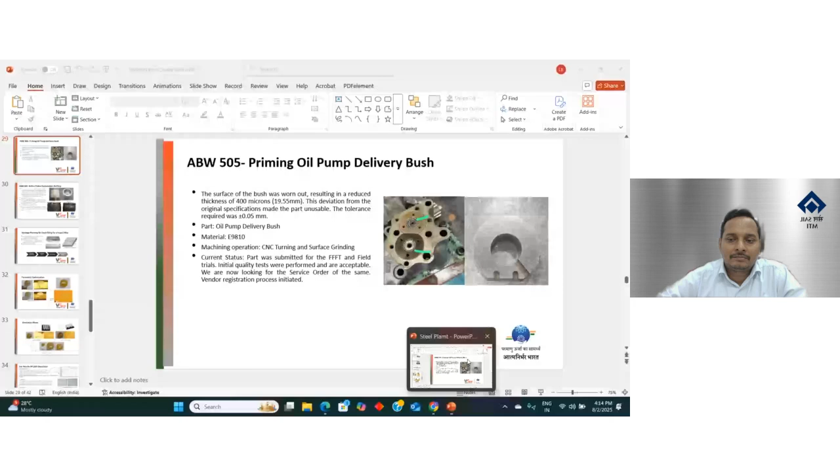Coming to VFuse Metal, it's a part of Adroitec Group. It was founded in 2023, and it has been incubated at RRCAT Indore, which is our Department of Atomic Energy associated research center. We majorly focus on metal 3D printing, MRO, and cladding-based services.

It's a DIPP recognized startup. We are driven to provide best-in-class additive manufacturing solutions. Our vision is innovating manufacturing one layer at a time, and our mission is to promote indigenously developed technologies in metal AM and additive manufacturing to the global market. Our core philosophy is a 3R strategy, which I will explain later in my presentation.

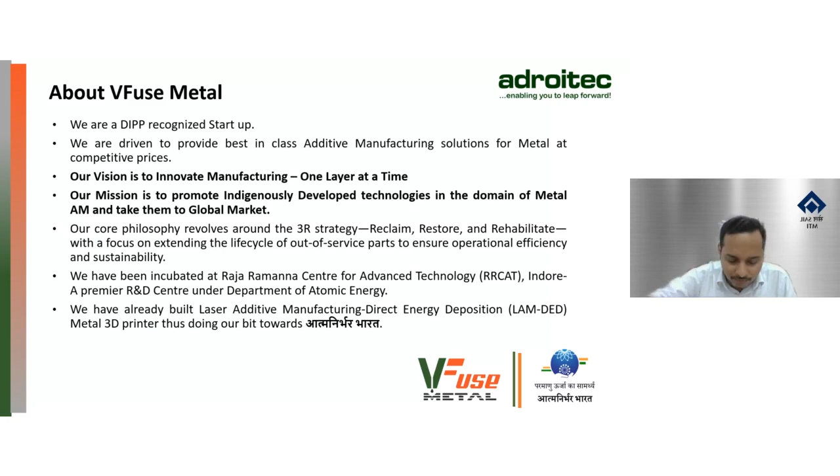Coming to the technology - there is a coaxial nozzle, as you can see here, in which metal powder comes from the side and a laser beam comes from the center. Wherever they meet, it forms a melt pool. This nozzle can be mounted on a 3-axis system, a 5-axis system, or an 8-axis robotic system for higher depositions.

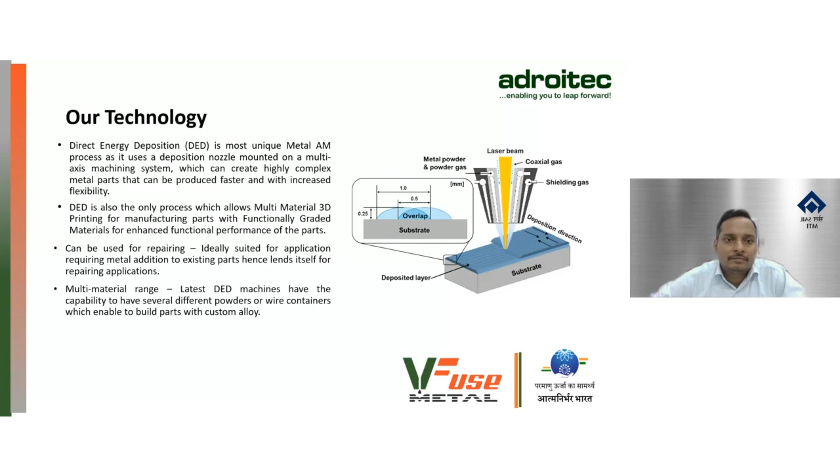This is a short launch video of our current system installed at RRCAT, our demo system. This was launched by Dr. Chintan Vaishnav and Dr. V. Narayanan, who is the current chairman of ISRO.

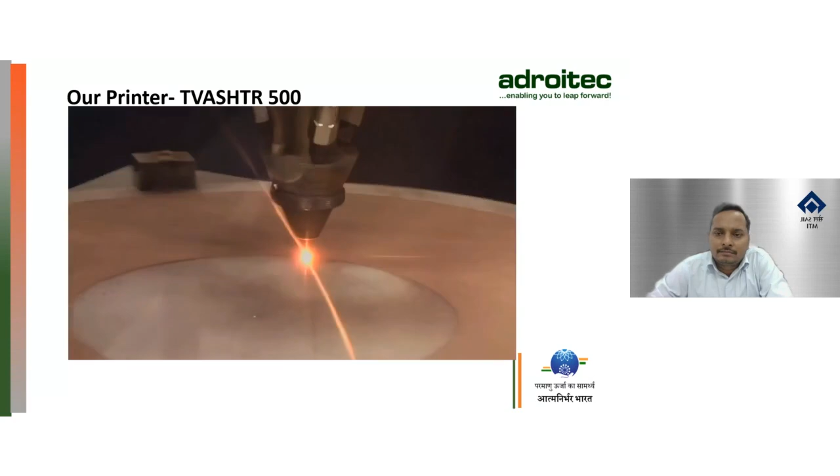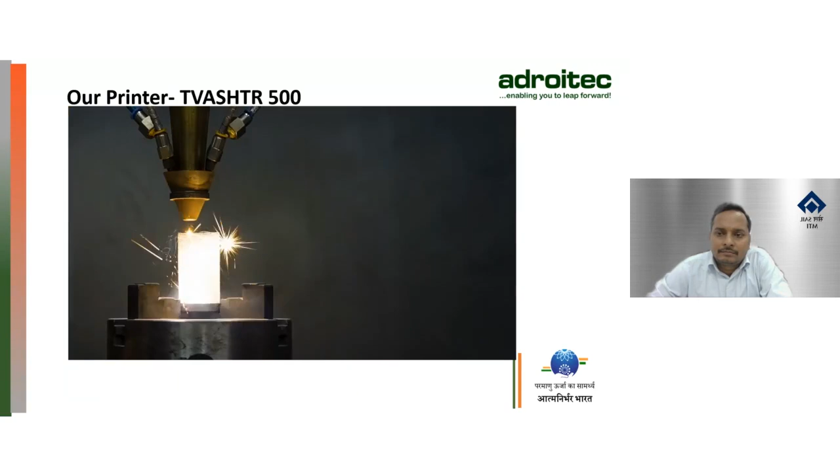Once again, we would like to highlight the fact that this is an indigenously developed metal 3D printer, which is working successfully, and we have completed it. Lalit is going to share more. So the deposition head has been built in collaboration with RRCAT Indore. We are further working and improving it. So this is the core we want to highlight here.

Coming to our capabilities, we are a system manufacturer and can provide system enhancements as well. We are an OEM, so we can provide system manufacturing services. A custom system for your specific needs can be designed and manufactured for you. Whatever enhancement you want in our current system, we can provide, as I will explain in the next few slides.

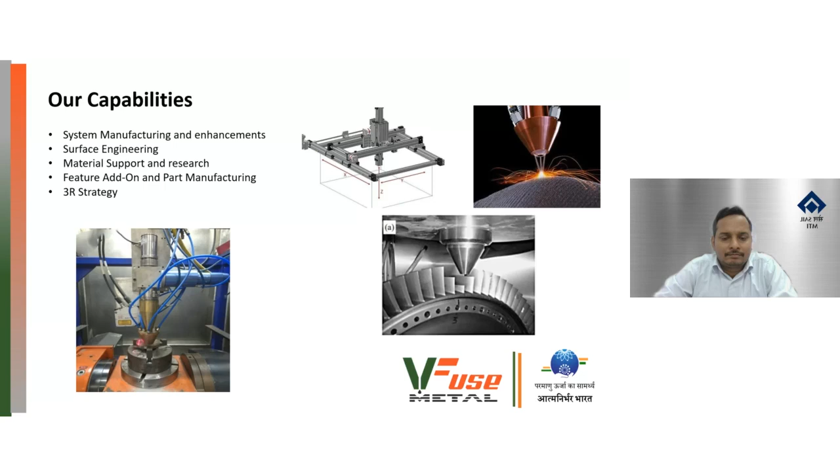Our second capability is surface engineering, material support and research, feature add-on and part manufacturing, and the 3R strategy.

Our capabilities include customizable system manufacturing. The current system we have installed at RRCAT is a 5-axis system with a high laser power of 2 kilowatt and a build volume of 500 by 500 by 300 mm. For material research, we have designed a new system called TVASHTR 250, a material research engine with low operation cost, basically meant for research centers and IITs.

On TVASHTR Robo Plus, we are integrating wire arc additive manufacturing with laser additive manufacturing. Bulk deposition and large deposition at faster speed can be done through wire arc, while small features and fine geometry can be done with the laser DED process. So we are integrating two additive manufacturing solutions on one single platform.

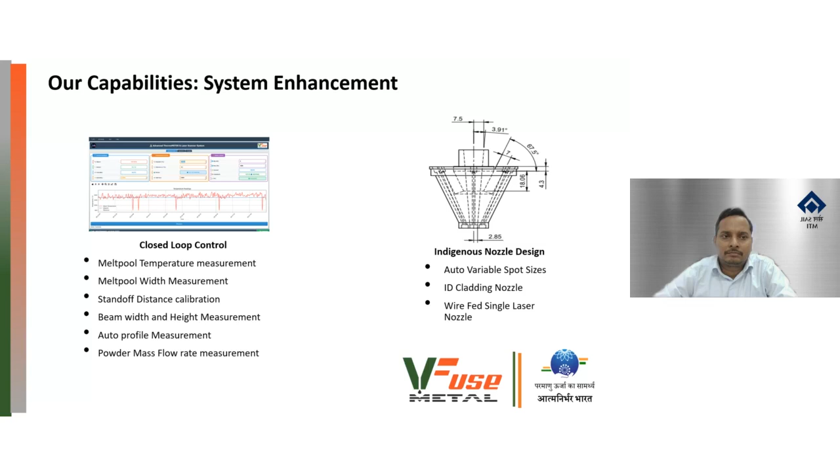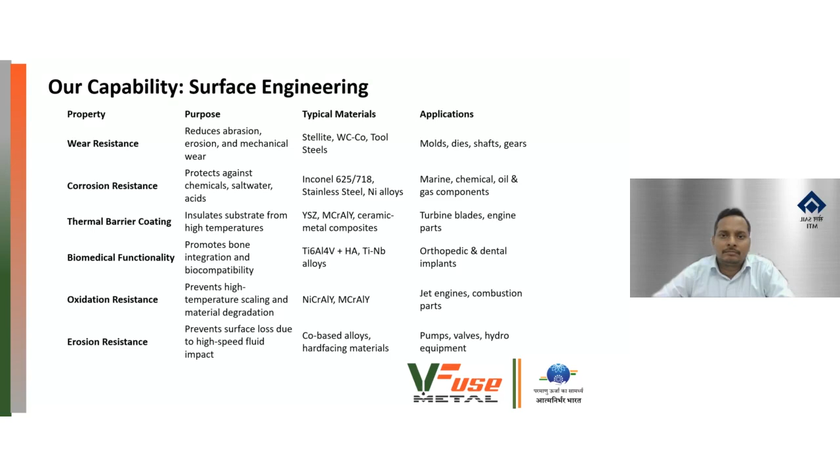Coming to our capabilities in surface engineering, we can provide wear resistance, corrosion resistance, thermal barrier coating, biomedical functionality, oxidation resistance, and erosion resistance to steel plant parts that generally get eroded or corroded during operations. We have already tried most of the materials, and I will showcase a few case studies in the next few slides.

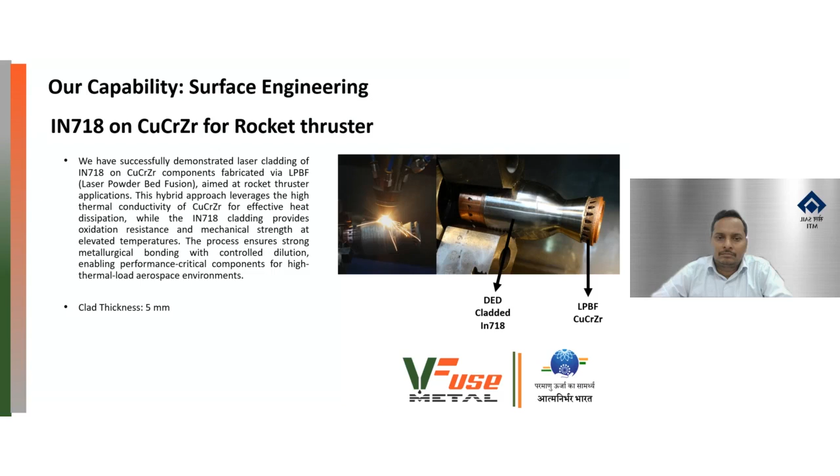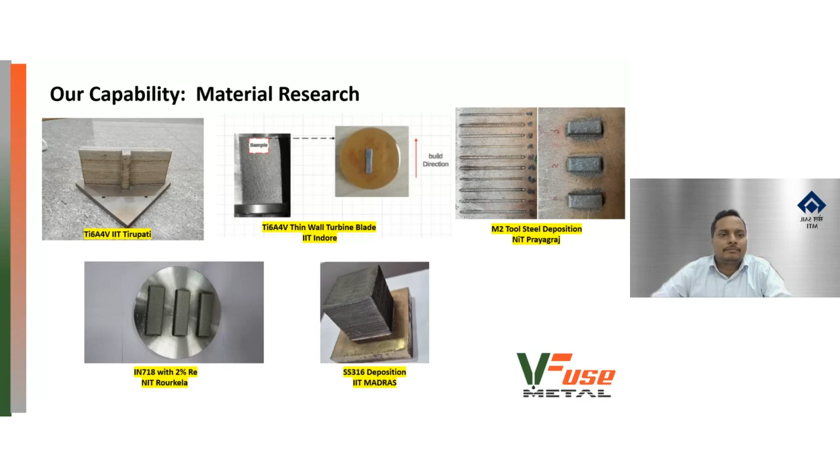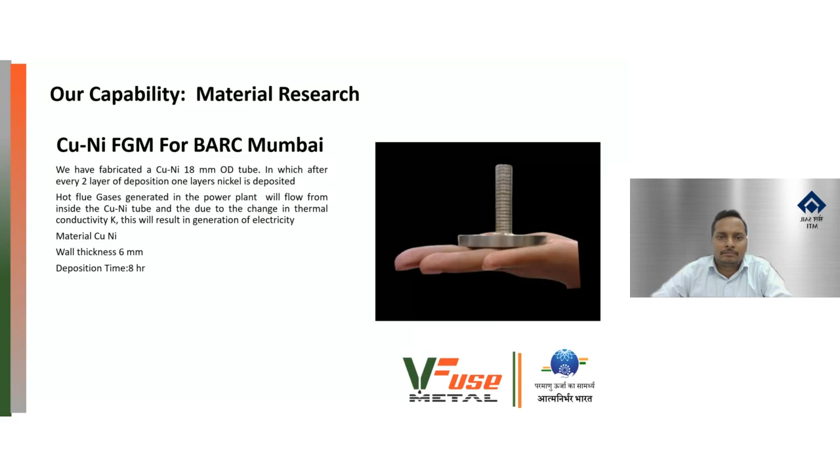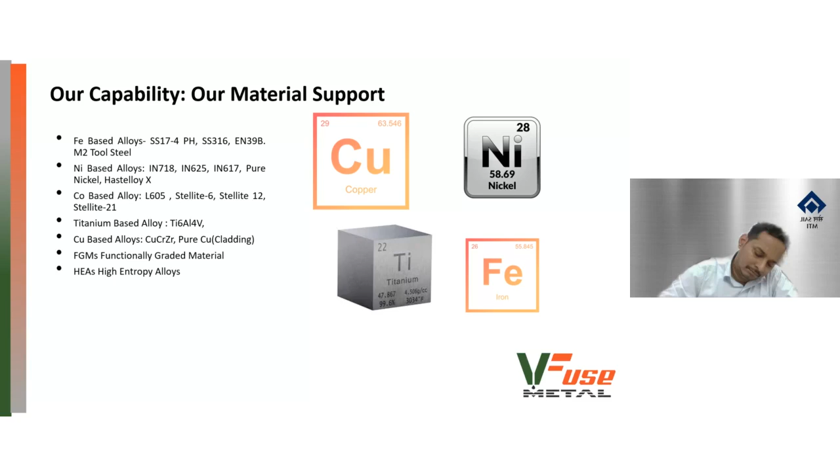These are the current material support that we provide. We have extensively researched on Fe-based alloys, nickel-based alloys, cobalt-based alloys, titanium-based alloys, copper-based alloys. In cobalt-based, we have basically done with L605, Stellite 6, Stellite 12, some super alloys to have very good wear resistance.

These are some of the material research we have done with RRCAT.

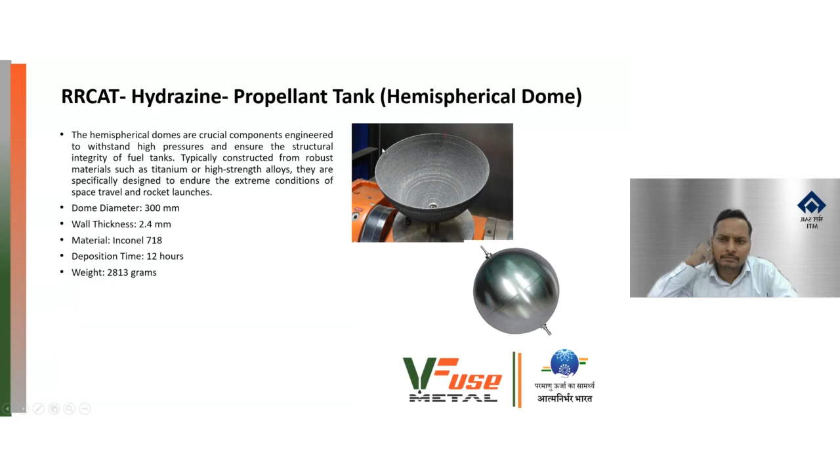Coming to our third capability, which is feature add-on and part manufacturing. So we have manufactured a hemispherical dome for one of the space organizations. This is a 300 dome kind of structure. This is basically a rocket propellant tank in which the hydrazine will be stored.

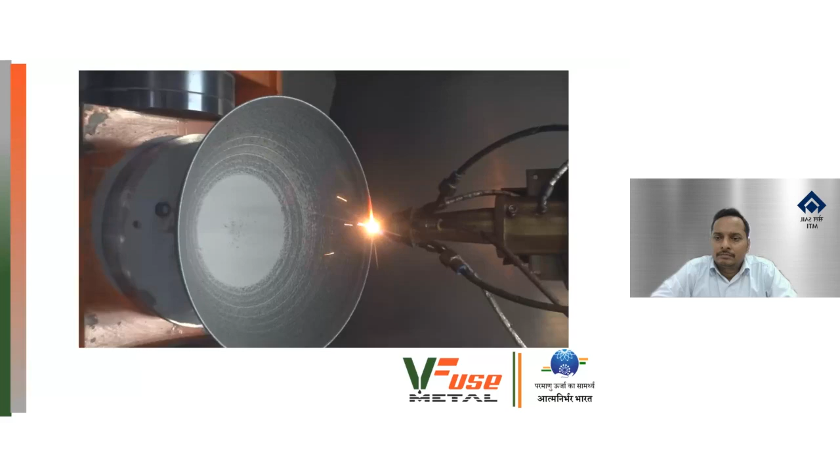A small video of deposition just to give you an idea of how a 5-axis system can be used for having supportless parts in additive manufacturing.

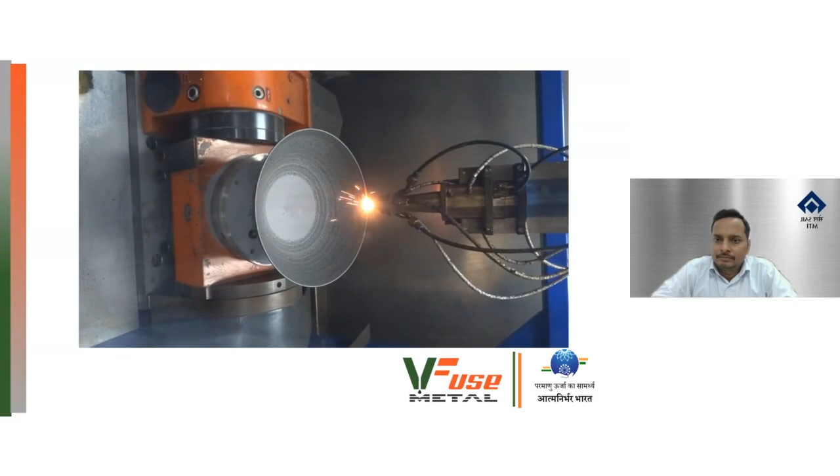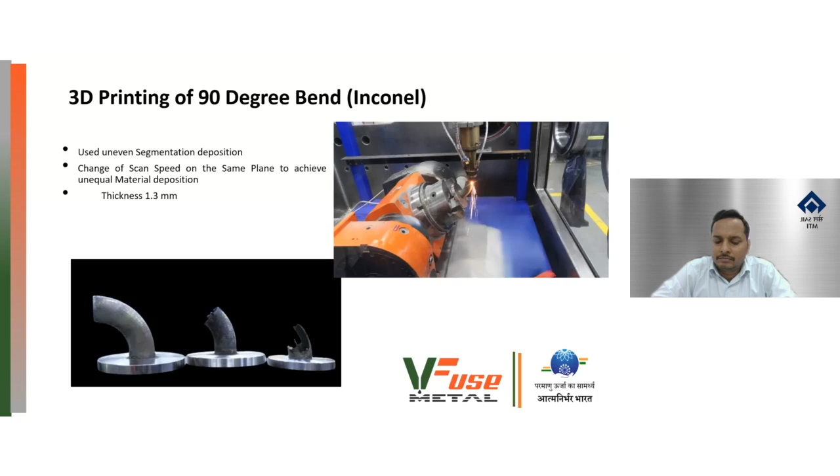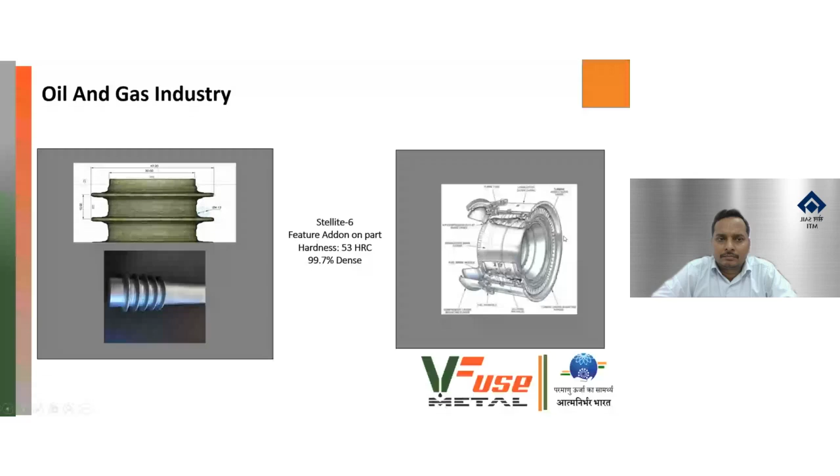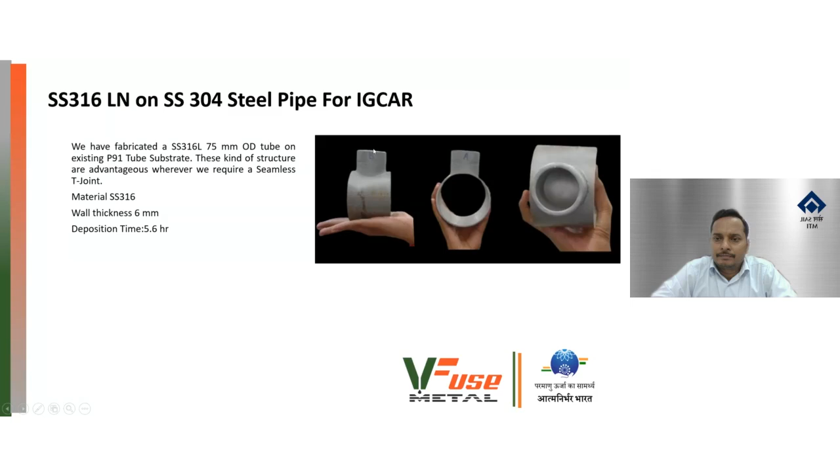So our major capability is MRO, and I think this will help steel sales as well, majorly because the majority of the parts in steel plants are imported out, or the steel plant itself is Russian made or made outside. So generally the parts get worn out, and we have to import those parts. So the whole supply chain management needs to happen here.

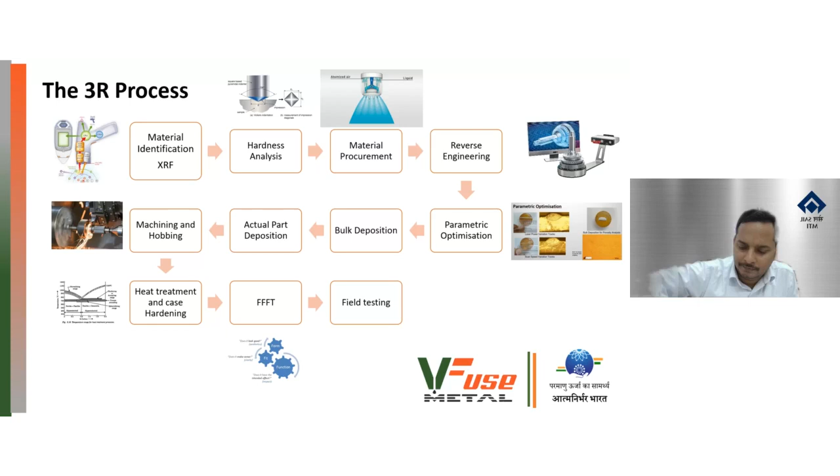So carry on, Lalit. Yes. If it's a new material, then we will do the parametric optimization of it, and then on the actual part we will deposit it out. We do the machining, the heat treatment, triple FT, form fit, and functional trials will be done, and it will be given to field testing for actual in-the-field performance.

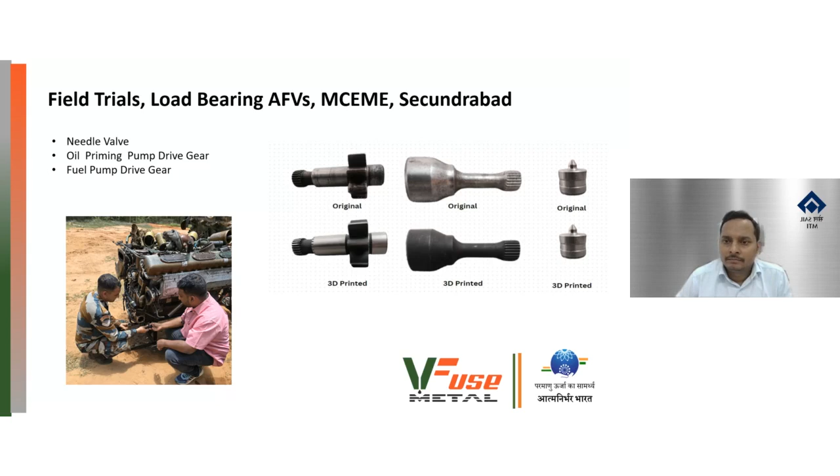These are some of the parts that we did for a load bearing tank. These are the gears in EN39B, and we have successfully done field trials for these gears. Worldwide, majorly, most of the industries, no one in the world has printed EN39B before.

This is a new strategy that we are proposing. Suppose there is a gear which has been worn out, or one of the teeth got worn out. We will remove that particular tooth, deposit that particular tooth, and then do the wire EDM of it. We will machine it out, case harden it, and give it back to the field.

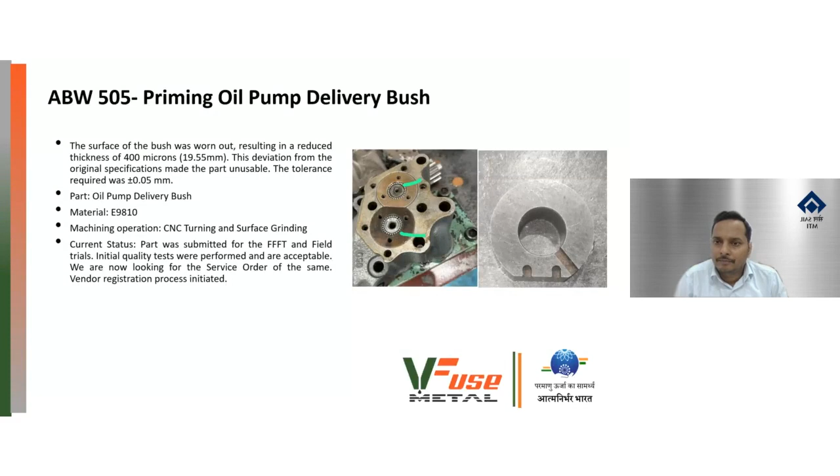This is again a project we do for defense. Basically, this is an oil pump assembly of a tank. So the top portion of the assembly, this is a bush, which generally gets worn out only by 400 microns in thickness. We have redeposited it, machined it out, case hardened it, and given it back to service.

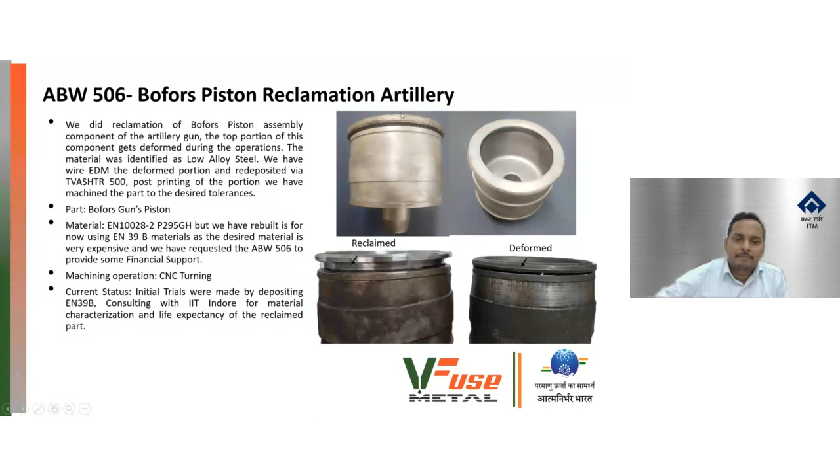This is a piston for a Bofors gun. This is a project we are doing in which the top portion is deformed. You can see it in this particular picture. We have redeposited and remachined it, and given it back to service.

This is a project we are doing. We did it for one of the defense laboratories, in which we have defined a strategy to fill 100 by 0.2 by 2 depth cracks, which is generally available in most industries as well, in dies and molds. This is an aero engine part, and we have successfully deposited material.

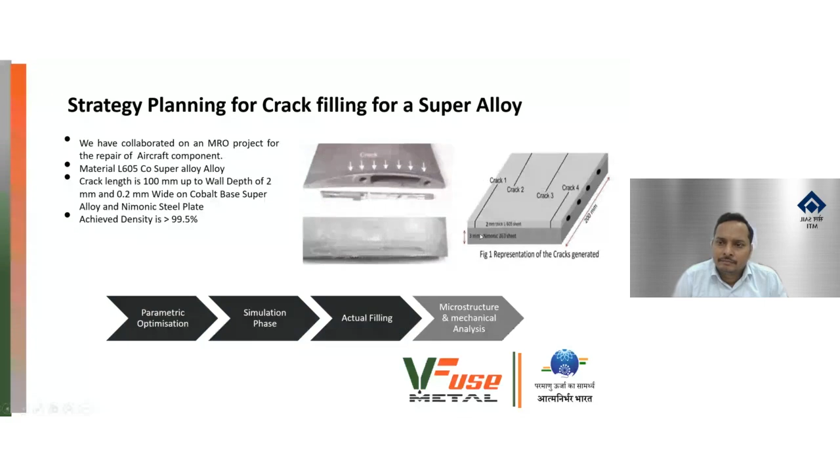We have derived a strategy. They provided us a similar simulation plate for it, and we derived a strategy to repair these kinds of cracks. So in this, we have grooved out the crack to a 5 thickness by 2 depth, using a trapezoidal strategy and a semicircular strategy, and we have tried it.

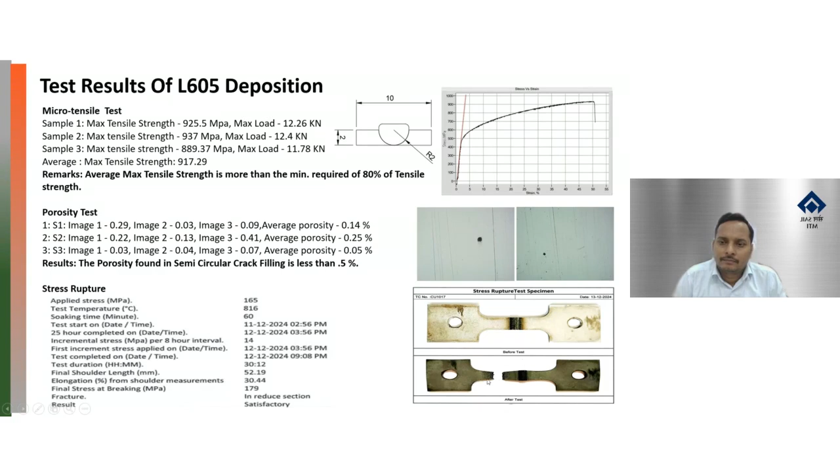If you do the laser welding, what will be the results? We found that with the semicircular strategy we got the best results, with our maximum tensile strength of 917. The actual part has a tensile strength of 896 MPa, and we have basically achieved porosity levels less than 0.5%. The good fact is, at 816 degrees Celsius, under stress rupture test, at 179 MPa pressure stress, it broke from the substrate, not from the crack that we had deposited.

These are some other cases that can be useful in your scenario as well. This is a fixture in which one portion got worn out, so we tried to reclaim that particular portion. I cannot name the client for this because it's under NDA.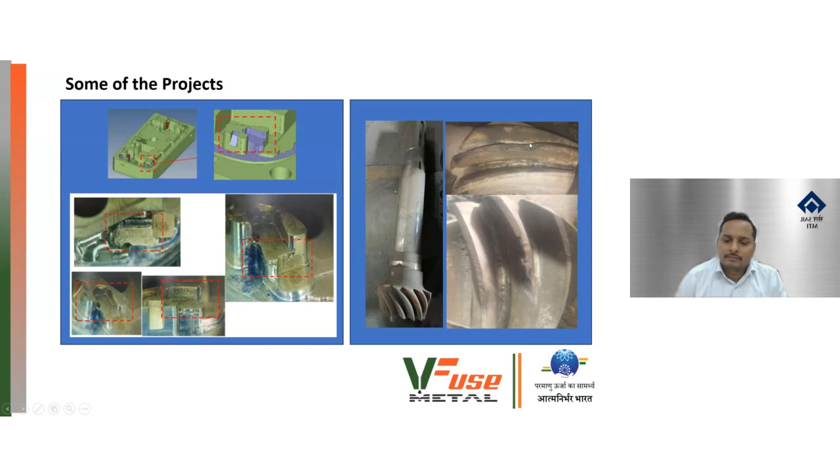This is a tooth which is deformed on a 1 meter long gear shaft pinion, and we are reclaiming this particular tooth as well.

Some of the steel plant case studies: this is a case study we are doing for one of the steel plants, in which we are enhancing the wear and corrosion resistance of the steel rolling mill rollers. We are depositing Stellite 6 over it and tungsten carbide over it.

Currently, we are evaluating the material side of it. We have collaborated with IIT Indore for this particular project, and also with PEC Punjab, Chandigarh, so that we came up with good results for them on how to basically achieve wear and corrosion resistance, and how to repair rolling mill rollers, cold mill rollers for steel plants.

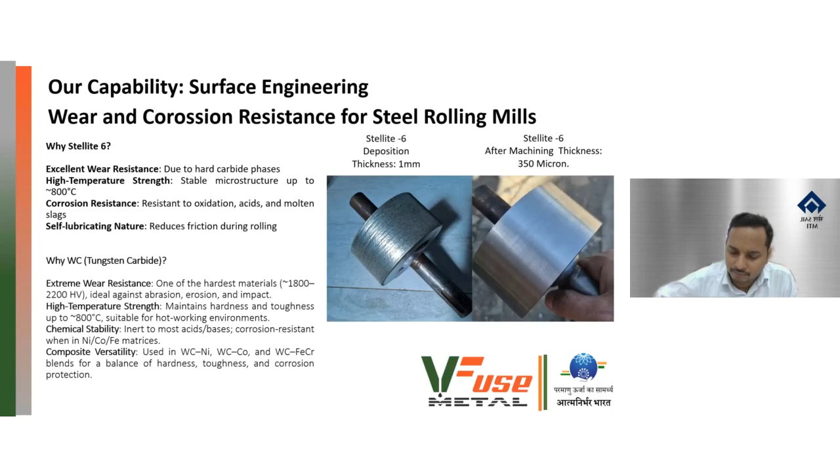These are some worldwide case studies for steel plants, including stone crushers, crusher rolls coatings, ball mill coatings, and ID claddings. We have a specific nozzle for ID cladding where you can clad inside the material and repair inside the pipe as well.

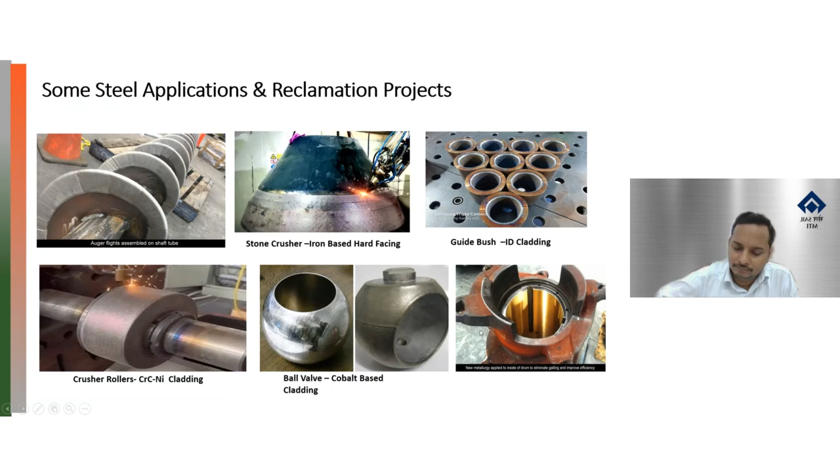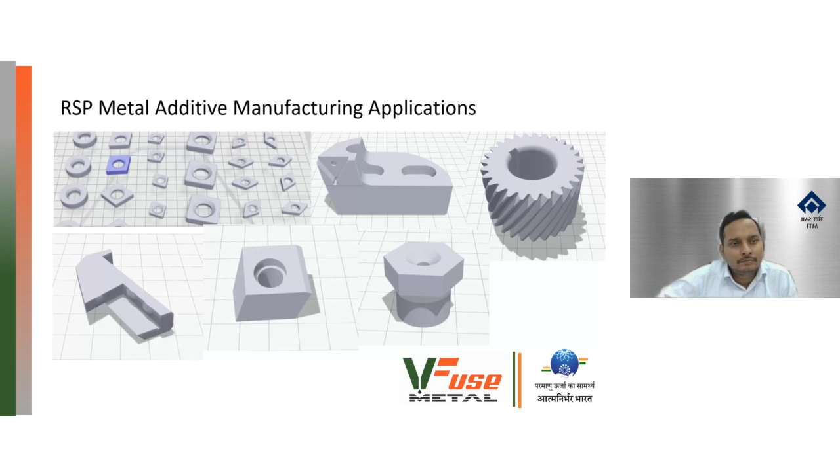These are some use cases of RSP, Rourkela Steel Plant. They have also installed one metal additive solution. We have a team there and we are completely supporting them for their design and manufacturing processes. These are some of the parts that they have printed on their machine.

So thank you so much, Lalit. Sorry, Chandra sir, please go ahead. Yes, yes. So thank you so much.

It was really interesting to see so many use cases coming up across industry, specifically using metals. Can you shed some more light on the setup that we have at the Rourkela Steel Plant, how it is operating, and the type of printer that we have there?

Yes sir, am I visible to the dais? Yes, you are visible. Yes sir. Just a minute, Lalit.

Sir, prior to that, we were dealing with those 3D printers back in the days when Rourkela Steel Plant installed the systems there. But now we are very specific on the technology, and this particular technology is much more developed than the RSP one. So yes, we have supplied that, we have successfully run that, and we have successfully done the hand-holding for each and every person, the users of Rourkela Steel Plant.

But for the better proposition of the product as well as the technology, my suggestion will always be for a DED technology for any steel plants where there is no choice of materials as well as no choice of size. As Lalit rightly said, the size can range from very small tiny parts, like what we did for Vedanta steel where the part size is maybe half an inch, up to something as big as a cold roll mill which can be meters in length. So ideally for any steel plant under SAIL or any defense or DRDO organization, currently DED is the most suitable technology for that.

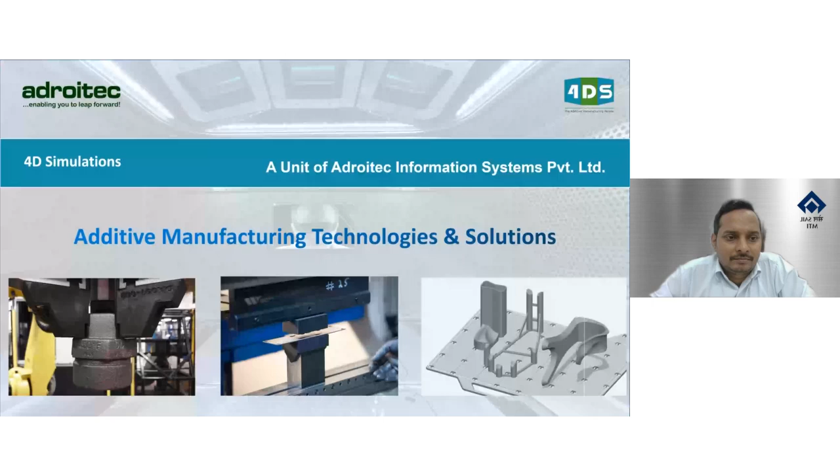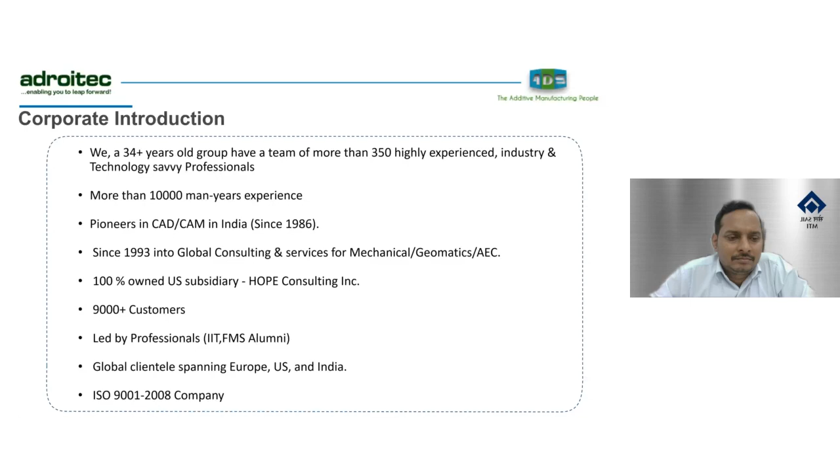As Abhishek sir, Vinod sir, and Manoj sir have already informed you, we are part of Adroitec. Under Adroitec, we have a group called 4D Simulation. Let me talk about Adroitec first - we are a 34-year-old group, and we are the pioneers into CAD CAM since 1986, and currently we are into 3D printing. Specifically for 4D simulation, we currently have every technology available in 3D printing - FDM, SLA, SLS, DMLS, and as Lalit has informed you about DED. So we have every technology that is available in the entire world.

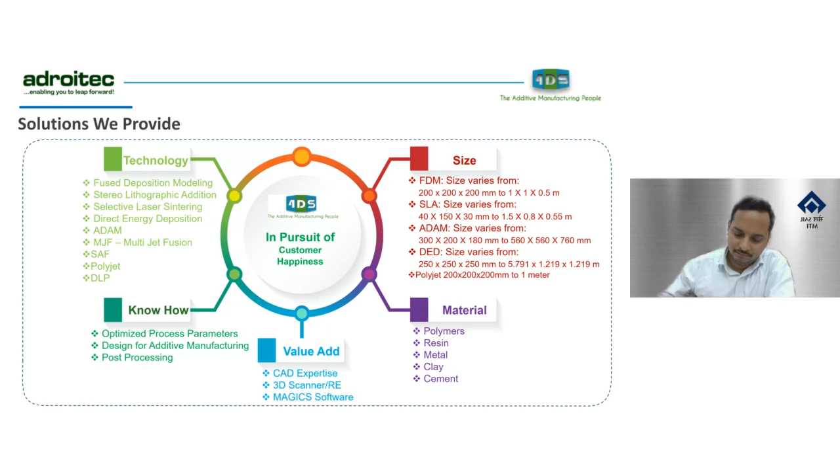Apart from that, the material that we talk about, we have every one of the materials that are available, which include basically polymers, resin, metal, clay, ceramic, cement, everything that you talk about.

So let me talk briefly about the technologies. The first one is FDM, or fused deposition modeling. In this one, there is a filament which is completely plastic or polymer, thermoplastic, which is heated up to a semi-liquid state and extruded on a build platform to get layer by layer addition, and through which you get a completely 3D printed part.

Next one is SLM. SLM currently uses metal particles, metal powder having 15 to 45 microns particle size, and using argon or nitrogen gas flow, we start to sinter those particles to make a single layer, which is added layer by layer to make a completely 3D printed part. So these are the samples for metal parts.

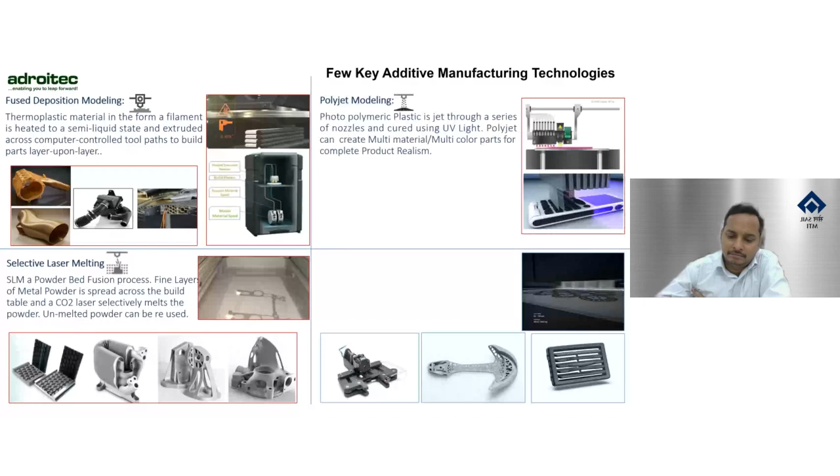Apart from that, we have polyjet technology, which is patented by Stratasys. In this one, we have resin material. As you can see in the video, the resin material extracts out from the head, then we have UV light which solidify that liquid material, and it gets addition layer by layer.

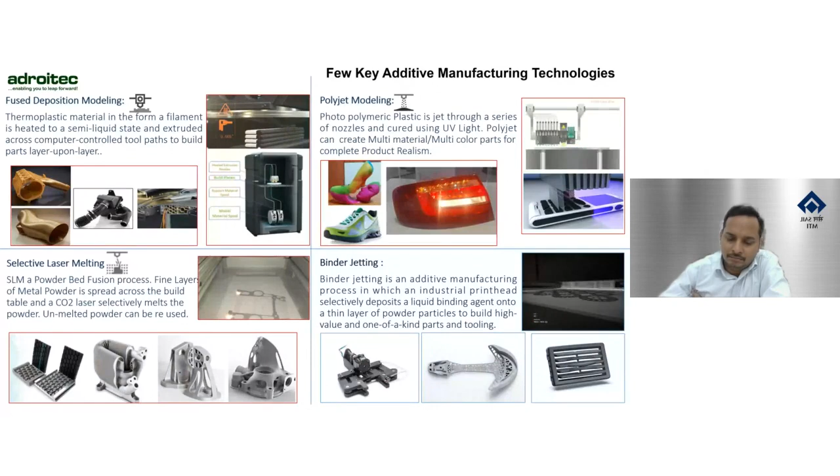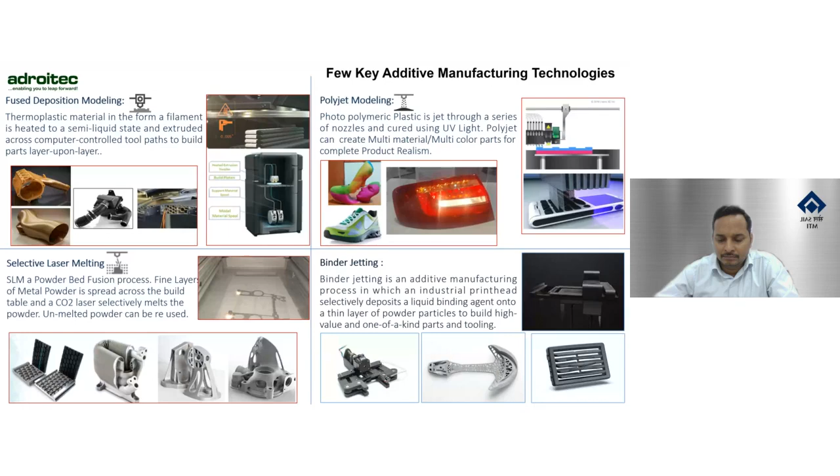The last one is binder jetting, in which we have a binding agent. The raw material is also a polymer, completely nylon. The binding agent binds that polymer, and later on, using high intensity heat, it adds layer by layer. So with Stratasys, we have a good portfolio.

Currently, the one I will talk about today is the F370 CR. CR means composite ready. So what is the plus point for Stratasys? We have multiple materials starting from ABS, ASA for prototyping, up to high temperature materials which include nylon, nylon plus carbon fiber, or Diran. Then we have easy use of this machine.

So these are basically the technical specifications for the machine, as you can see over here.

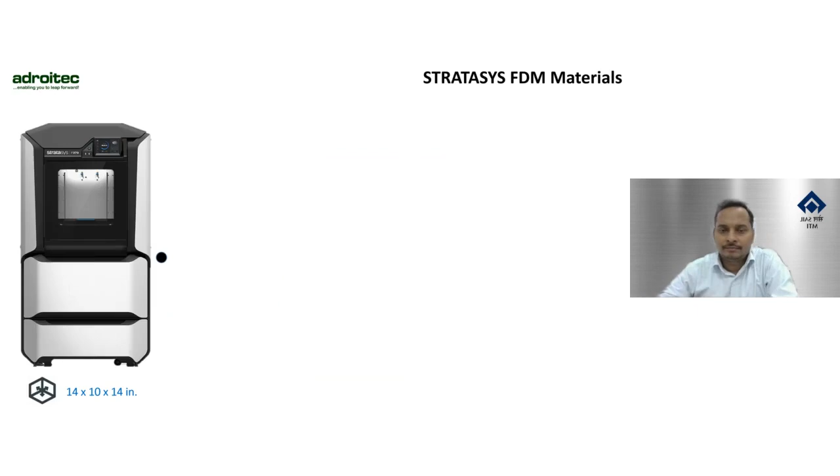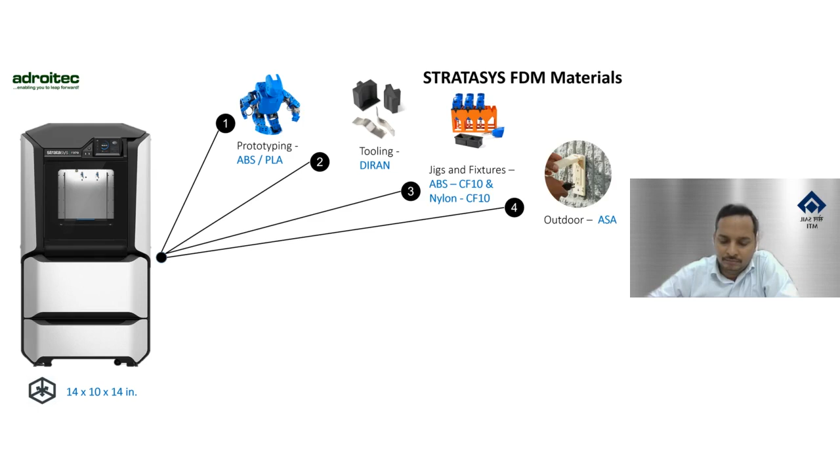As you can see, we have a good material range starting from ABS or PLA. Then for tooling, we have Diran. For jigs and fixtures, we have ABS CF10 and nylon CF10. If you are using the part outdoor, we have ASA material, which is completely ABS but having UV resistant properties. For electrical enclosures, we have ABS ESD material, which resists electrostatic discharge. Then we have flexible material, which is TPU. Apart from that, if you want an assembly part, we have PCABS, which is a composite material.

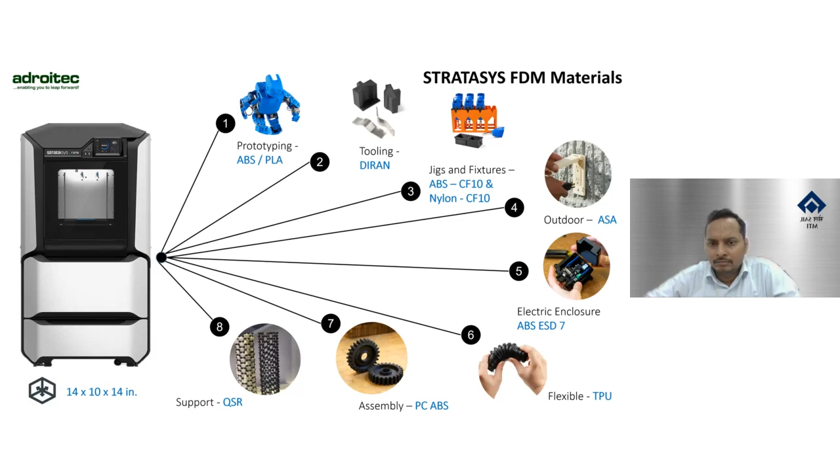The plus point for this machine is, whenever we need supports to get the part printed in 3D printing, the supports used in this machine are water soluble. You just dip the part into the water concentration for 1.5 hours, and after that, all you get is your part without any supports.

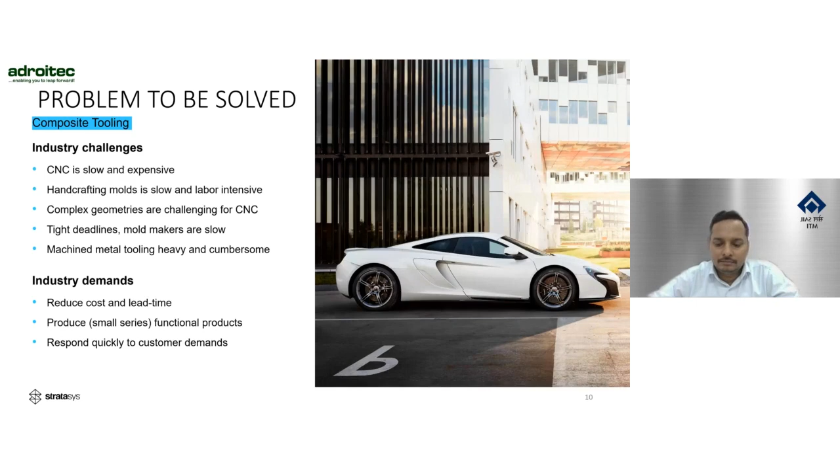So why do leaders use additive for tooling, jigs and fixtures? Because it's cost-effective, time-saving, accelerates production timelines, and allows rapid replacement. Currently, most traditional ways, which include CNC, are very slow. We have a case study in which we replaced a part that was earlier done with CNC, which was taking around 2 to 3 months. After using additive manufacturing, we fulfilled that need in 2 to 3 days. That is the plus point for additive manufacturing into polymers.

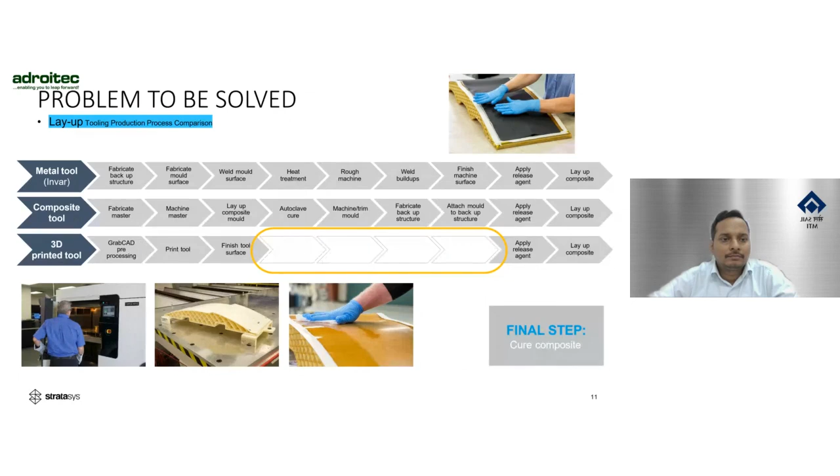If you talk about the traditional way, a metal tool needs a long layup process to be done, while in 3D printing you just have to do pre-processing, print the part, finish it up, and you can use it anywhere you want.

So the materials that I talk about, those are industrial materials.

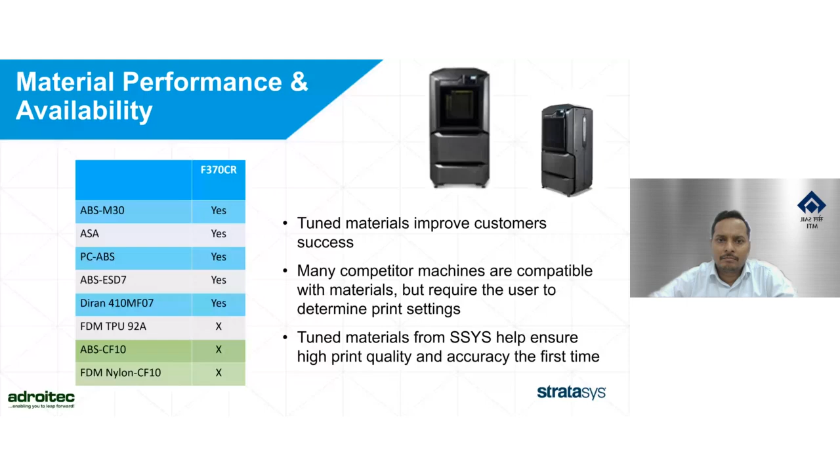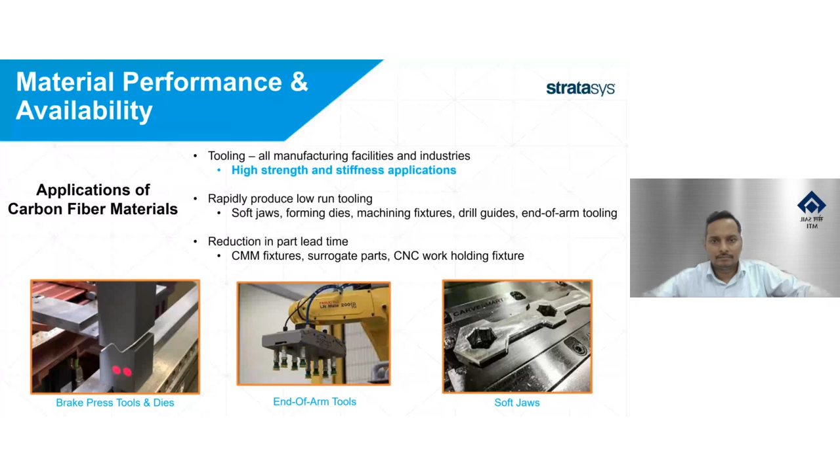So you can use it anywhere. If you are talking about jigs or tooling, you can use that into steel industry. One plus point for F370 CR is you can use carbon fiber material as well. If you can see the brake press, tool and die, end of arm tools or soft jaws.

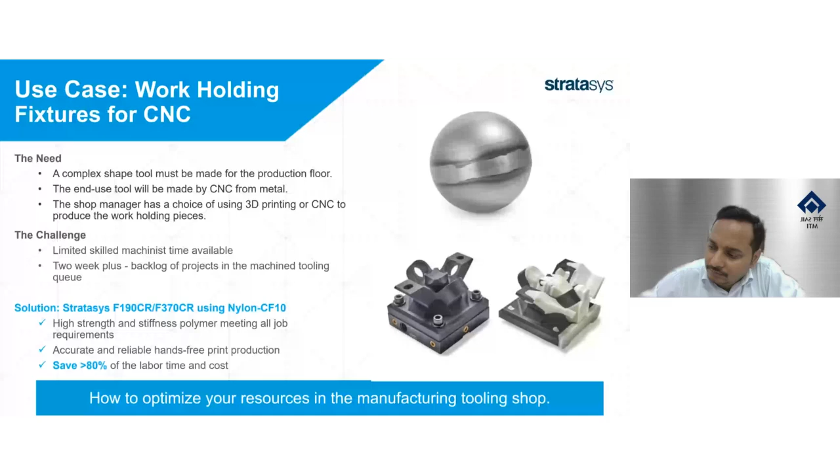There is another application for jigs and fixtures. If you can see here, it has an internal cavity which was not available, which can't be printed into some other 3D printers, whether FDM or SLS, any of the technology. But in Stratasys, the cavity can be reproduced using soluble support material. That's where this technology stands out.

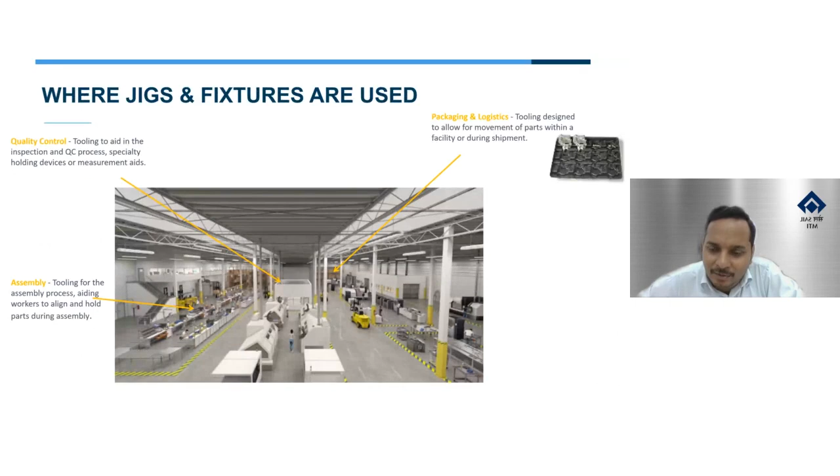If I talk about where jigs and fixtures are used, it can be used into assembly, quality control, packaging and logistics, health and safety, and equipments.

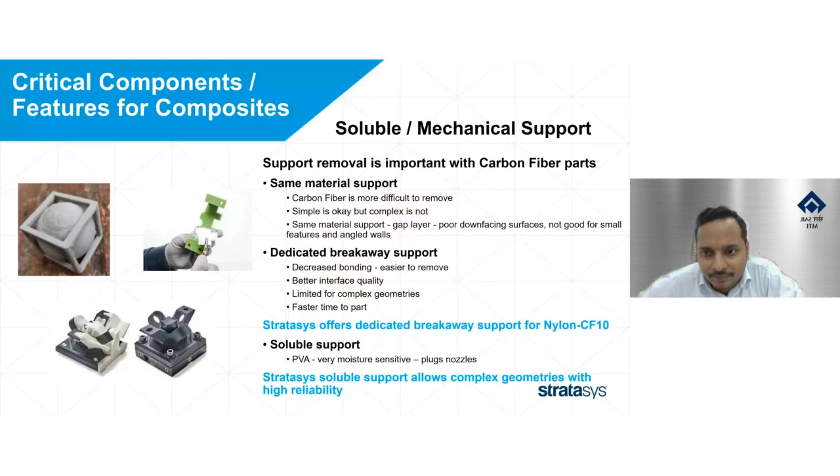I won't take much of your time. The soluble support, which I already talked about, is one of the applications.

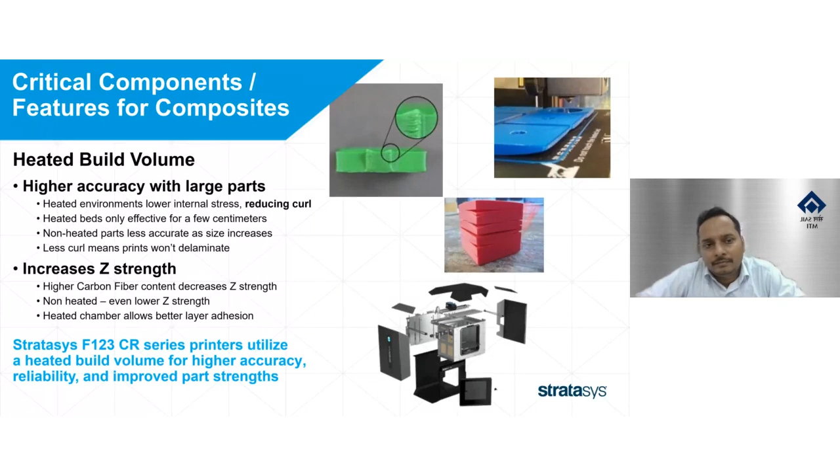The plus point for using Stratasys machine is having a high heated build chamber. What happens is, if you are talking about polymers, there are very restrictions, and if you are using 3D printers, you have already faced this kind of issue. In Stratasys, we have a heated chamber of around 150 degrees Celsius, through which your part accuracy will be excellent, somewhere around under 15 microns. That is the plus point of using a high heated build chamber.

Plus, if you are having a large part, we have different chambers of material using around 3200 cubic inches. So you can use it for a large part as well.

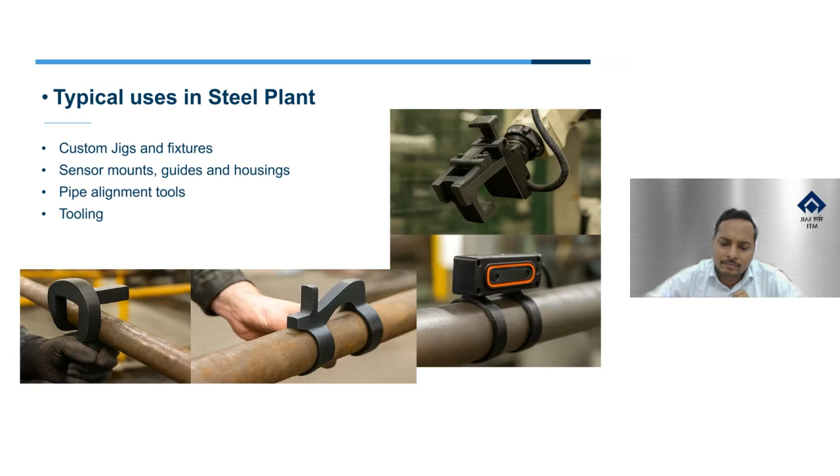If I talk about typical use in a steel plant: custom jigs and fixtures, sensor mounts, guides, housing, pipe alignment tools, and tooling parts.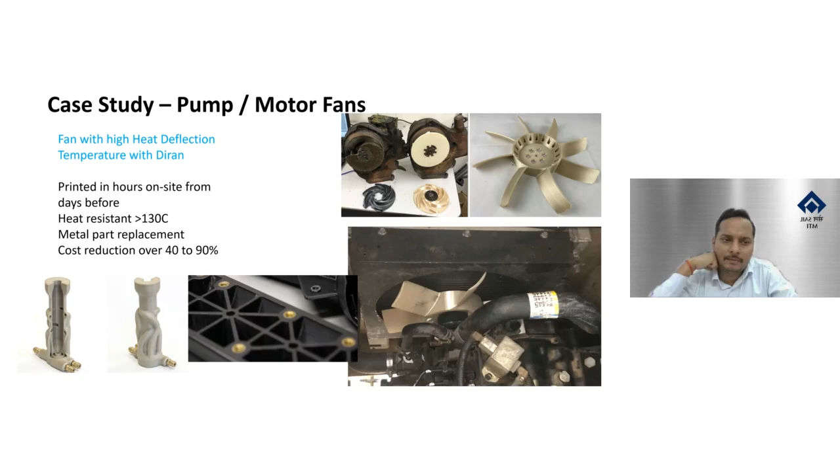I think you have heard about Opel. They have been using this machine for the past 8 years to print jigs and tool fixtures for their daily use. Apart from that, this is the polymer stuff which I just talked about.

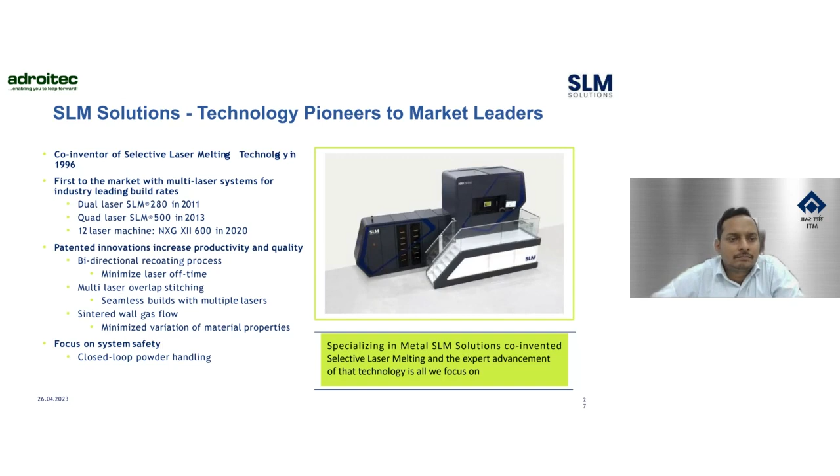Now the next thing is we have the SLM machine, which is metal 3D printing. SLM is basically from Germany, and they have just partnered with Nikon. We have SLM 280, which has dual laser, then SLM 500, which is quad laser. And now, just in 2020, SLM has introduced a 12 laser machine to cut down the time for printing a metal part.

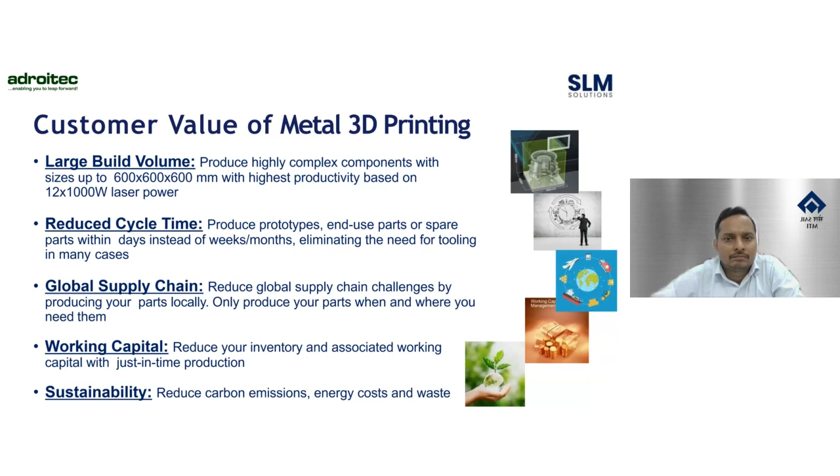The size that you are getting in SLM is around 600 by 600 by 600. The working capital has the plus point of reducing your inventory and having a digital inventory. So whenever and wherever you want the part, you just get it printed and use it later on whenever it is required.

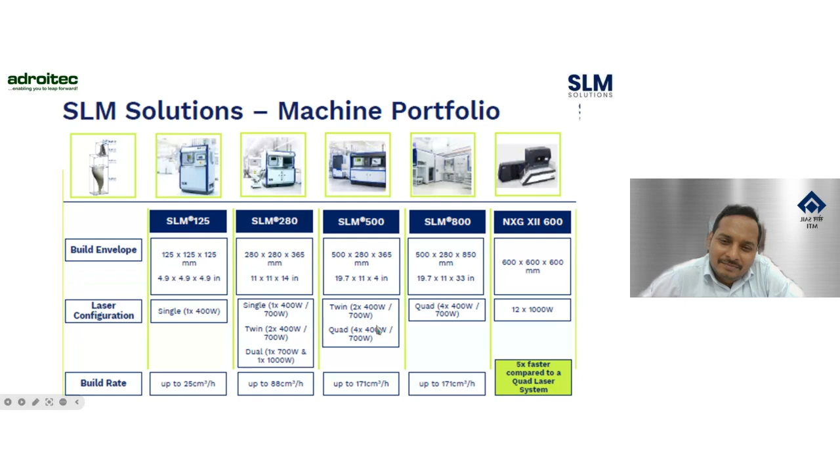This is the complete portfolio for the SLM. Currently we have SLM 280, which is 280 by 280 by 365. If you talk about number of lasers, it is increasing rapidly from single laser to around 12 lasers, which is 5 times faster compared to the quad laser as well. If I talk about materials, we have aluminum, different alloys such as AlSi10Mg, AlSi9Cu3.

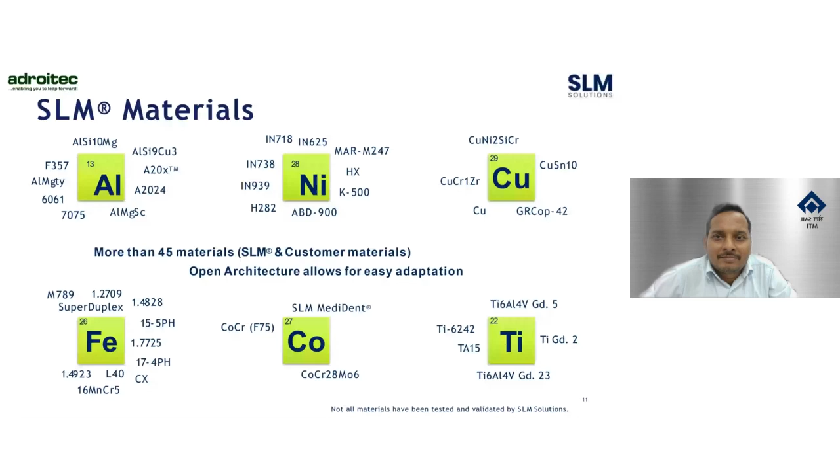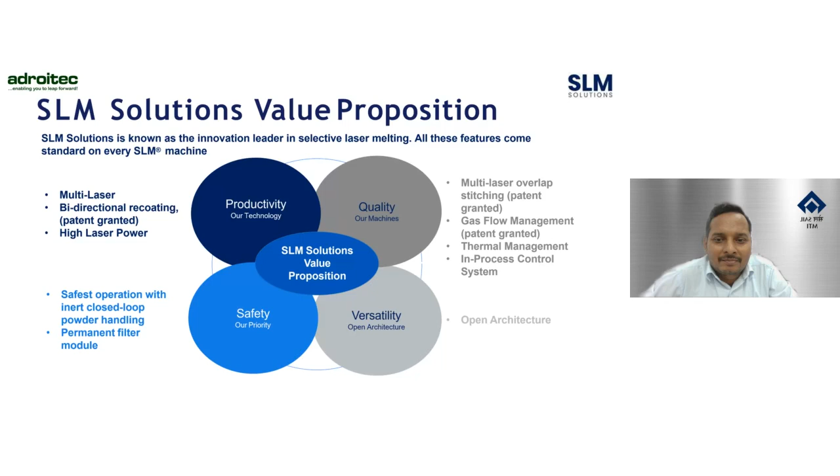We have copper, titanium, cobalt, and stainless steel as well, apart from Inconel and other materials. So basically, with SLM, we have productivity, quality, versatility, and safety. These are the mainly required points we are having. Plus, the plus point for this SLM machine is you have open architecture, so wherever you want to have metal powder, you can print your part into that material using SLM technology.

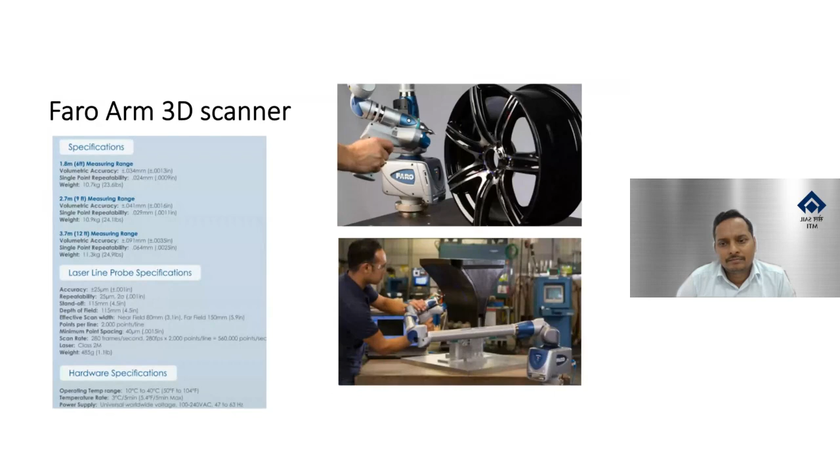If you are having too much accuracy requirement, around 15 to 20 microns, then we have a CMM probe which can be used to detect the surface of the part. But if you want a little speedier process, you can use these lasers, the blue lasers. The robotic arm that we are having for these 3D scanners starts from 1.5 meters and goes up to around 6 meters. So this is the whole process.

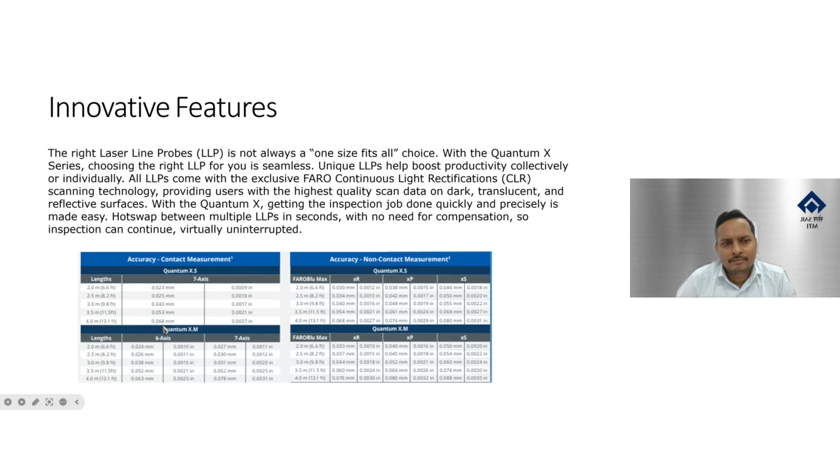So yeah, these are the specifications, just like I told you about the accuracy. For 2 meters, we are having 23 microns, and if you talk about 4 meters or more than that, we have 68 microns. So yeah, this is all from my side. If you have any question, please put it up.

Thank you so much. I understand the time we had fixed for today's session was not too much justice given the relevance and the amount of technicalities involved in this discussion. Nevertheless, it was a wonderful presentation, both for metal printer as well as polymer printer. A lot of potential and the use cases are clearly visible that can be used. In fact, it is being used in one of our own plants, that is Rourkela Steel Plant. Many of our participants might be aware. If you have not had the experience, I am given an understanding that they have already recovered the cost.